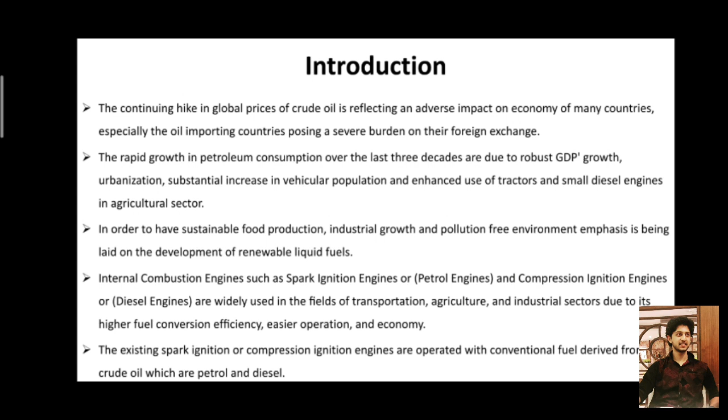Now, let's talk about the problem regarding this matter, which as we can see on the screen are: production of crude oil has become more difficult, the price of crude oil is increasing day by day, natural petroleum resources are getting depleted very fast, increasing pollution, damage to the environment, and pollutants such as unburned hydrocarbons, carbon monoxide, oxides of nitrogen, and smoke emission causing severe health hazards.

This will remain a threat to the healthy life of the people in many developed countries, in spite of various laws being enforced on exhaust emission, besides the steps being taken to protect the environment against pollution by enforcing rules and regulations for pollution control. There is still a need to find reliable alternative renewable fuels.

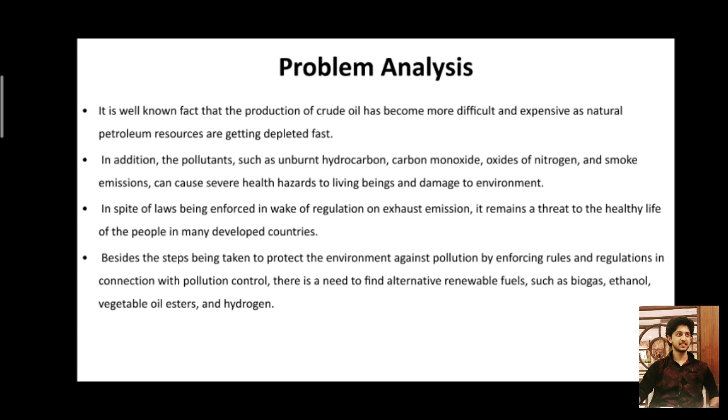Let's move ahead. With the problem being faced, there comes an objective to eliminate it. The main objective of this project is to study and evaluate the fluid properties on diesel engines and petrol engines using hybrid fuel blends, which are the combination of anhydrous ethanol, soybean oil and petroleum fuels. With an objective in mind, there comes an aim. The aim of this study is to review the use of a mixture of soybean oil and ethanol as an alternative fuel for internal combustion engines and use ethanol and soybean oil at stoichiometric ratio. Here the keywords are bioethanol, soybean oil, phase separation, diesel engine emission and petrol engine emission.

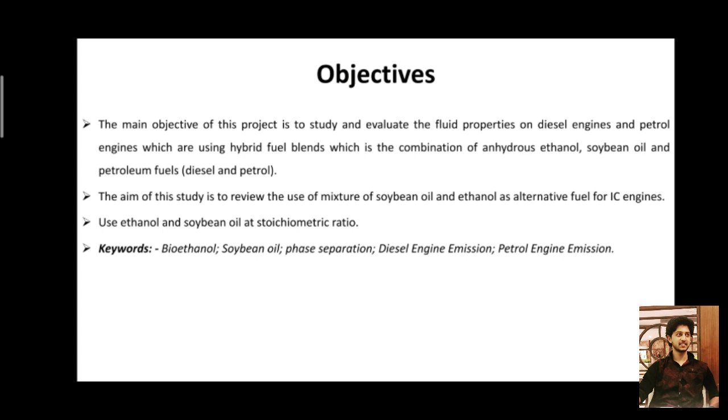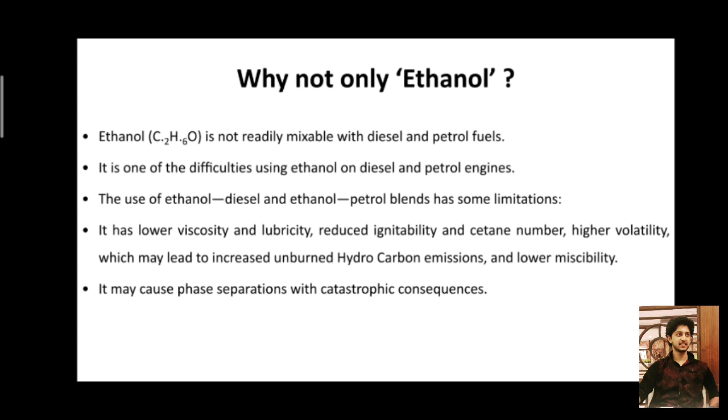Now, as we are using a hybrid fuel blend, a question arises: why can't we just use ethanol with diesel or petrol? Well, ethanol is not readily mixable with diesel and petrol fuels. It is one of the difficulties of using ethanol in diesel and petrol engines. The use of ethanol-diesel and ethanol-petrol blends has some limitations. It has lower viscosity, lower lubricity, reduced ignitability, lower cetane numbers, higher volatility, which may lead to increased unburned hydrocarbon emissions, and lower miscibility. This may cause phase separation with catastrophic consequences.

Moving ahead, with the same basic information, there comes another question in mind: why we need additives? The difficulties while using pure ethanol, adding with diesel or petrol for blends, can be overcome using additives. Ethanol could be mixed easily with addition of suitable additives.

Additives such as n-butanol, isobutanol, vegetable oil esters, etc. act as a bridging agent. This provides molecular compatibility and bonding and helps to produce a homogeneous mixture. Here we have chosen soybean oil as the additive.

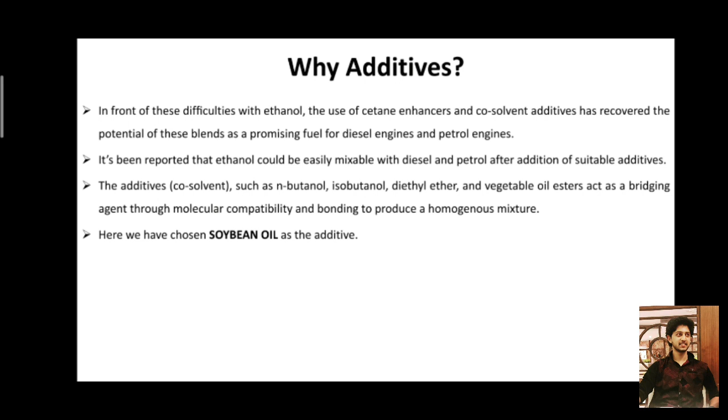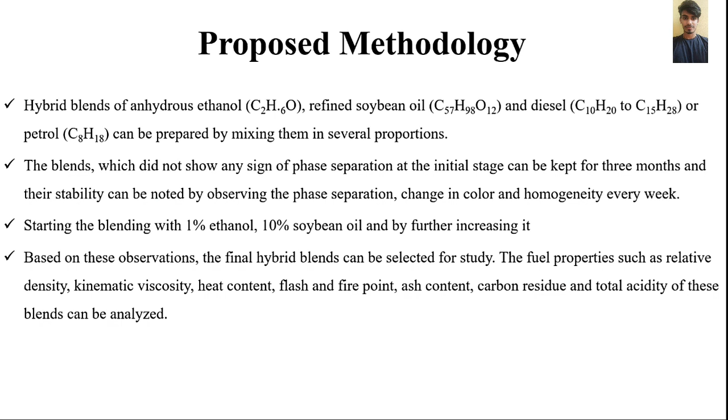The question that comes in mind is what would be the procedure to make a hybrid blend and how it can be analyzed? Well, here is the answer. A hybrid blend of anhydrous ethanol, refined soybean oil and diesel or petrol can be prepared by mixing them in several proportions. Start the blending with 1% ethanol, 10% soybean oil and by further increasing it.

The blend stability can be noted by observing the phase separation, change in color and homogeneity. According to this observation, the final hybrid blend can be selected for study. The fuel properties such as flash and fire point and carbon residues of this blend were analyzed.

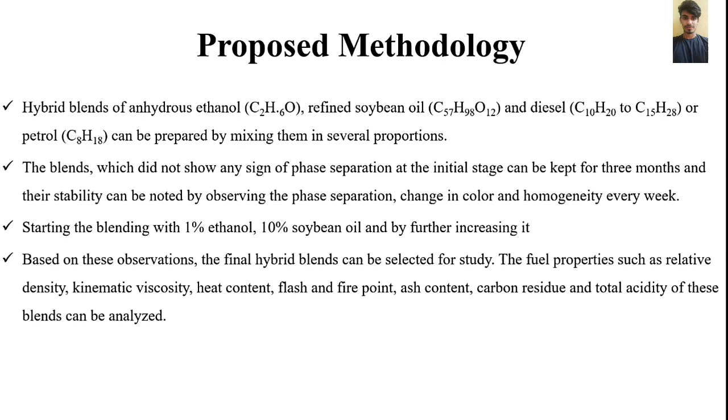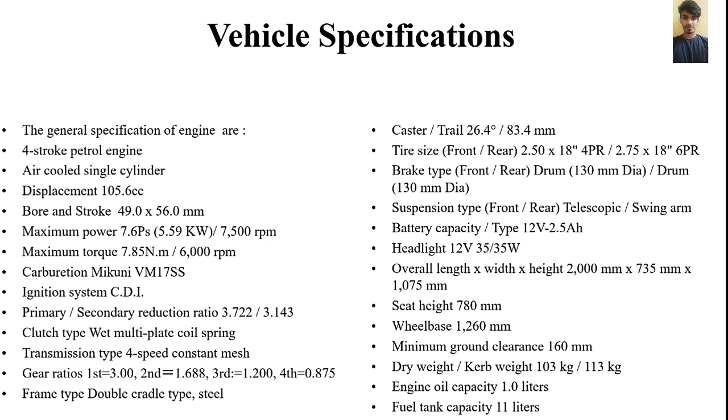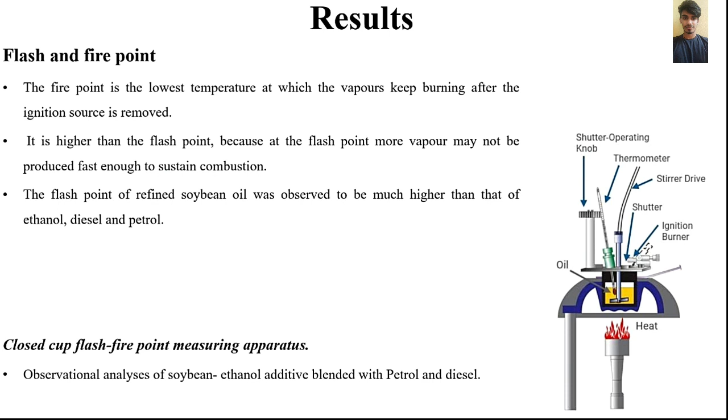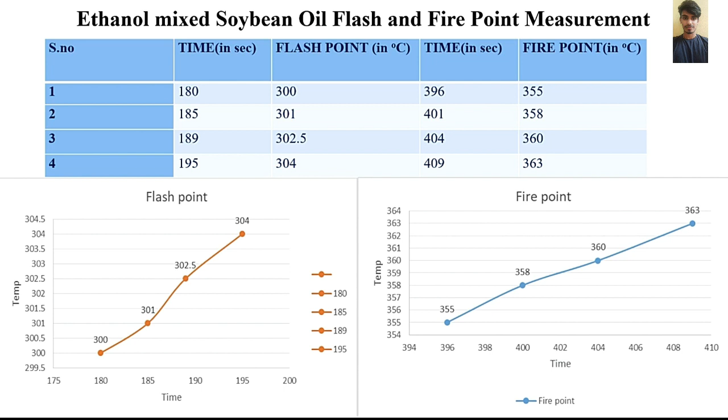For the investigation of proportion of emission, we made our own gas analyzer, which basically works on sensors and Internet of Things. The sensors which are used are MQ6, MQ135 and MQ7 sensors. These sensors measure harmful gases like carbon monoxide, NOx, NH3 which are emitted from the engine. They are used in air quality control equipment for buildings and offices.

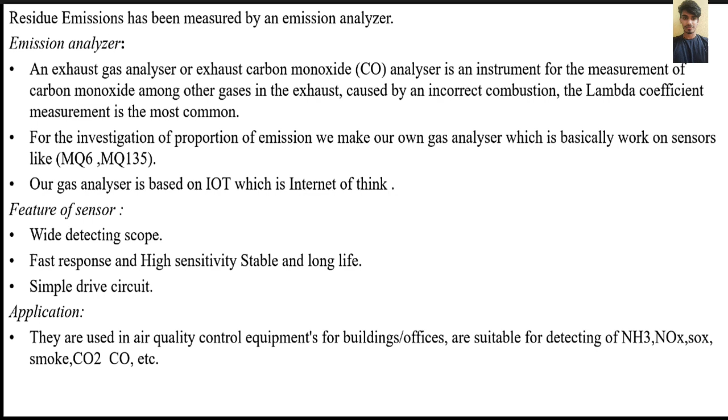These are the basic structure and configuration of our sensor. This sensor module contains 4 pins. First is VCC, which is plus 5 volts. Second is ground, which is the negative portion of electricity. Third is digital out, and fourth is analog out.

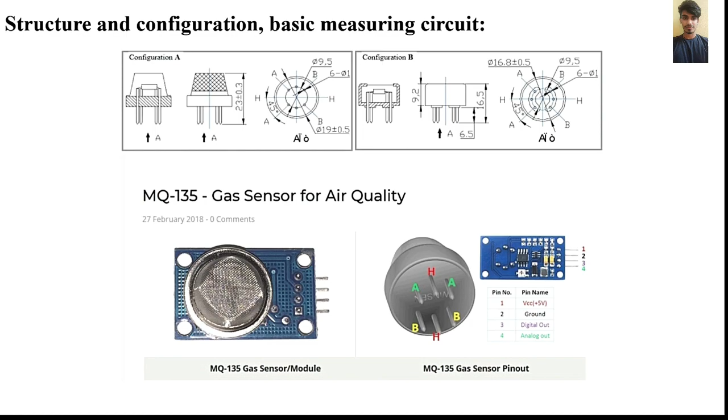This sensor is composed of a micro Al2O3 ceramic tube, tin dioxide sensitive layer, measuring electrode and heater, fixed into a crust made of plastic and stainless steel net. The heater provides the necessary work conditions for sensitivity.

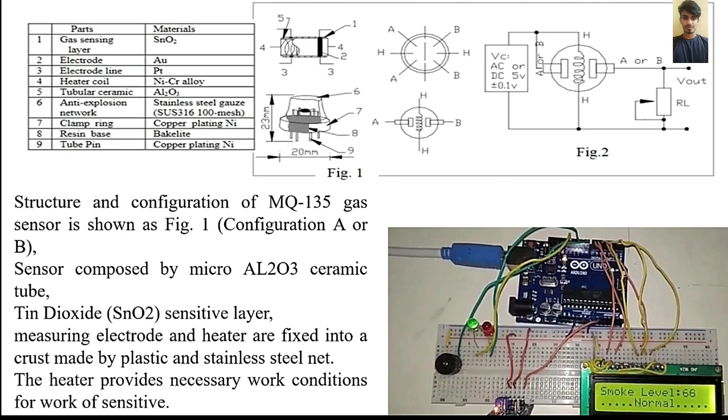So here we come to the conclusion that hybrid fuel containing anhydrous ethanol up to 20% level and refined soybean oil up to 40% level can have approximately compatible properties with diesel and petrol.

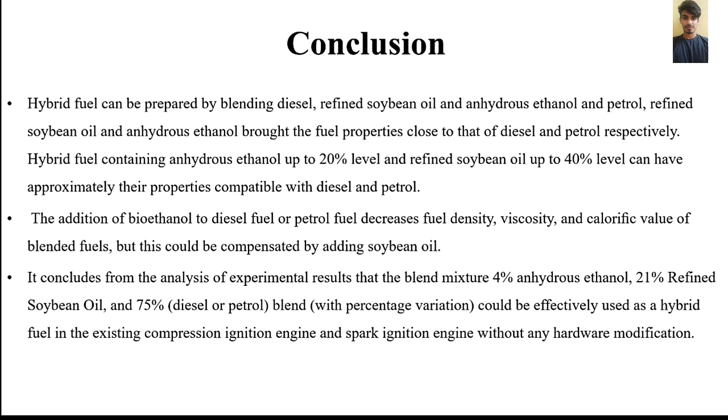It is concluded from the analysis of experimental results that the blend mixture of 4% anhydrous ethanol, 21% refined soybean oil and 75% diesel or petrol could be effectively used as a hybrid fuel in the existing compression ignition engine and spark ignition engine without any hardware modification.